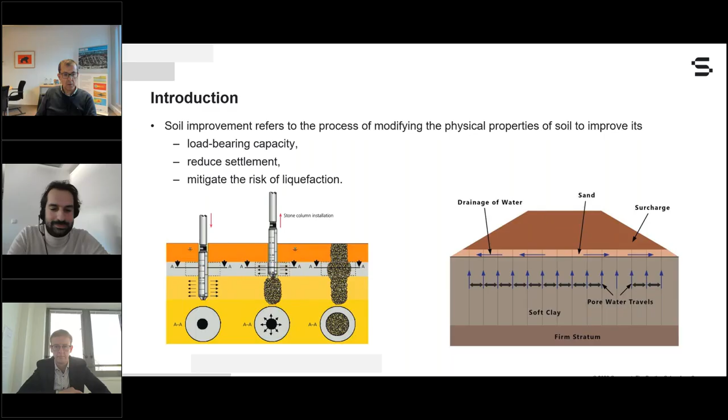So just to start with, a few introductions. I guess you are all familiar in this room with soil improvement techniques and what the main purpose of soil improvement techniques is. It is to fundamentally modify and improve the physical properties of the soil in order to ultimately improve its load bearing capacity, reduce settlement, and also in some cases where it's relevant, mitigate the risk of liquefaction. There are different techniques to do that, and it might be interesting to be able to efficiently model them in PLAXIS to optimize your design.

So when it comes to application of numerical modeling for soil improvement techniques, depending on the different type of methods, that would require different modeling techniques. We can briefly start talking about compaction methods.

The first ones I'd like to talk about are dynamic methods, maybe not the most popular, but still used to quite some extent, like dynamic compaction and compaction blasting, especially dynamic compaction. Those are not commonly practiced in finite element modeling due to their complexity, especially accurately modeling the dynamic impact and transient behavior. It's still possible, but not commonly undertaken.

However, compaction methods relying on static methods like preloading, often combined with vertical drains, as we will be showing today, are quite common. The key points consist of applying a static load, and the properties will be enhanced over time by consolidation. This is suitable for cohesive soil like soft clays.

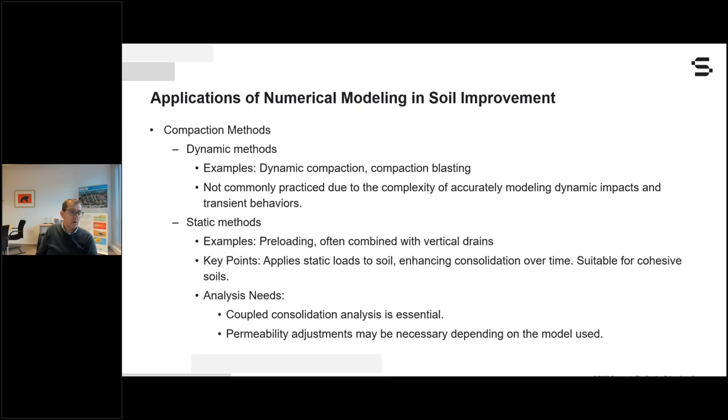This would require usually doing consolidation analysis, which are coupled analysis in PLAXIS, and this seems to be a key aspect. Also, as I will mention a bit later, permeability adjustments might be necessary depending on the model used. I will explain why.

So this is what I will first focus on today in my presentation: the use of PLAXIS for the modeling of preloading with prefabricated vertical drains.

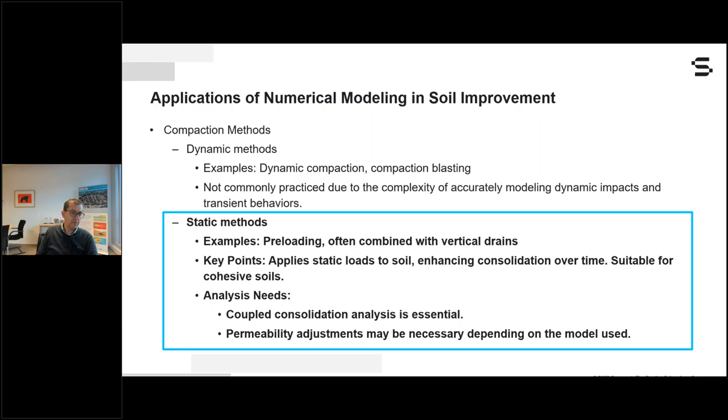Then there are other types of techniques that could also be used in PLAXIS, talking about soil improvement techniques which do not induce displacement of the soil. I could talk about soil freezing, I could talk about injections. For soil freezing, usually these are quite complex methods that require specific constitutive models to accurately capture the behavior of the frozen soil, and especially the change from normal soil to frozen soil.

Here as well, those types of analyses are quite seldom and not commonly performed. I mean, we do have some papers, but this is a very limited type of analysis.

On the other hand, injections are performed, and usually what people do in that case is just replace the property of the soil with that of the improved soil after the injection process has taken place, by just wishing in place a new material corresponding to the improved soil material.

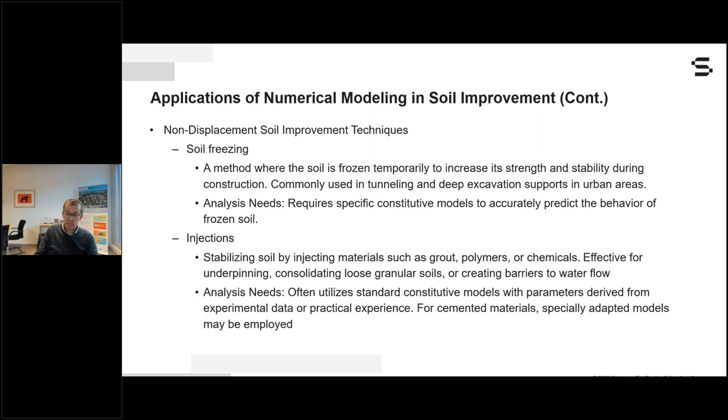This is something I've seen quite a certain number of times. I will not be talking about it today, but this is a possibility with respect to that particular type of soil improvement technique. And then the last one is related to improving by adding structural elements with or without soil displacement.

Especially here, we'll be referring to rigid inclusion and stone columns, which are the two most common types of soil improvement techniques that I will also briefly talk about in the second part of my presentation, before I then give the floor to Jérôme.

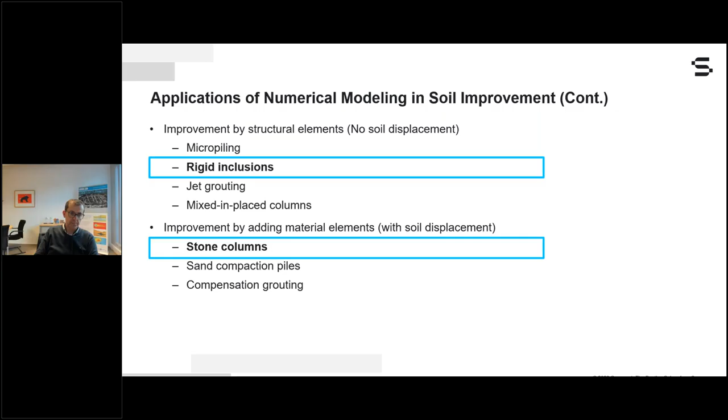So, modeling prefabricated vertical drains in PLAXIS, PVDs. The key modeling steps: first, defining the geometry by considering specifically the PVD layout within your PLAXIS model, with proper consideration of drain spacing, depth, and arrangement. Usually in 2D at least, that's relatively easy and straightforward.

Then the second part is focusing on the material properties. This is where I will be spending most of the time during this first part of the presentation, where we need to assign appropriate properties to the constitutive materials, especially the definition of permeability or equivalent permeability, as I will explain later.

Then the third step would be to define the boundary conditions and analysis setup by properly applying the initial conditions, the drainage boundaries, and finally defining the relevant construction stages. Then finally, result interpretation in terms of evaluating settlements, pore pressure distributions, and effectiveness of PVDs, by checking the factor of safety at different times, as well as the evolution of the degree of consolidation.

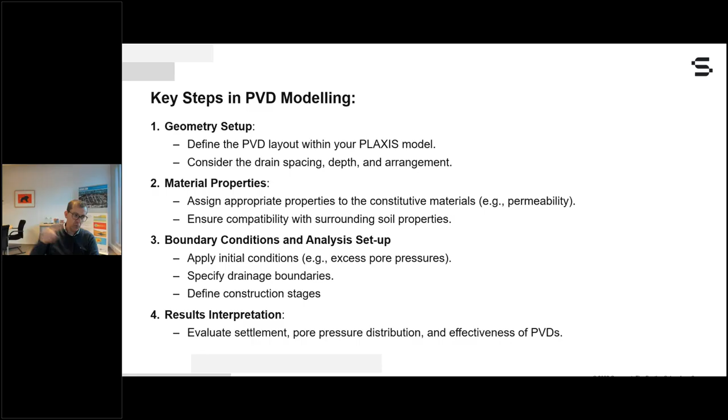As I was explaining, one of the key aspects in defining the properties is to define the permeability of the material. So if we look at the disposition, the setup of the drain, I'm looking at it from the top plane here.

If I compare on the left-hand side the way those PVDs are being placed, and the way we will be modeling them in a 2D framework, we see that in the 2D plane strain model, we are introducing a drainage length that is uniform and cannot properly render this spatial disposition in 3D, where depending on the location in the soil, you are introducing different drainage length.

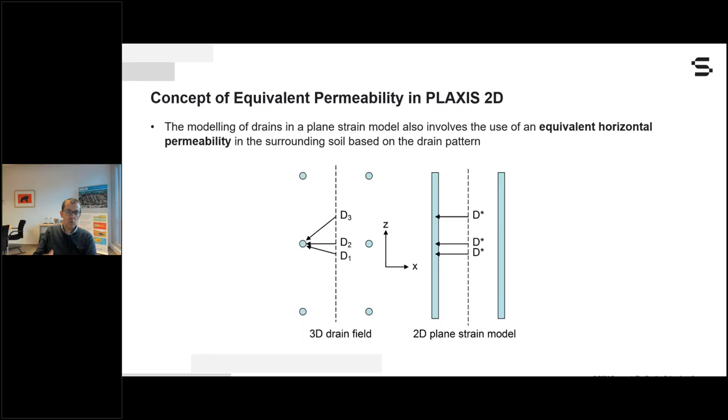In fact, if you use in 2D the same permeability, considering that in 2D the drainage lengths are shorter, you will speed up the consolidation process. So one way to address that, not the only one, is to introduce the concept of equivalent permeability, which consists of reducing the permeability in order to match the proper degree of consolidation in 2D plane strain and the one you would have observed in 3D.

There exist papers and methods that provide equivalent permeability. The three most popular are the ones from Hird, Indraratna, and Chai. This will not be described in this presentation, but in the paper and example we will be providing, we will give extensive reference and explanation on what those methods exactly consist of.

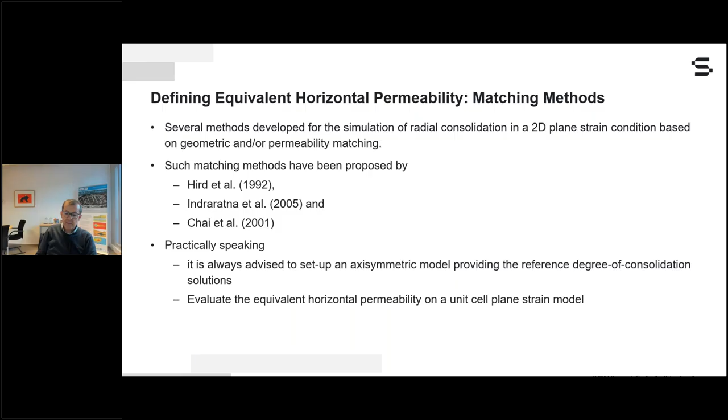The strategy is to first start using those permeability values, and then set up two models. On the left-hand side, a reference axisymmetric model, the radius of which is defined such that the drain affects the proper area relevant with respect to the drain spacing. Usually, if the drains are placed over a perfect rectangular pattern, the influence area would be S squared, basically S times S. So you make sure that your axisymmetric model area equals S squared, define the drain in the middle, apply a load, and look at the evolution of the degree of consolidation with time using the proper permeability values.

Next to that model, you define the equivalent unit cell model, but in 2D plane strain, usually using the same drain spacing. You make sure that while loading that 2D plane strain model with the same load as the axisymmetric model, you obtain the exact same evolution of the degree of consolidation with time. That's the idea. Usually you start from the formula I provided before, then fine-tune by slightly playing with the permeability values until you obtain a perfect matching. That's one of the methods.

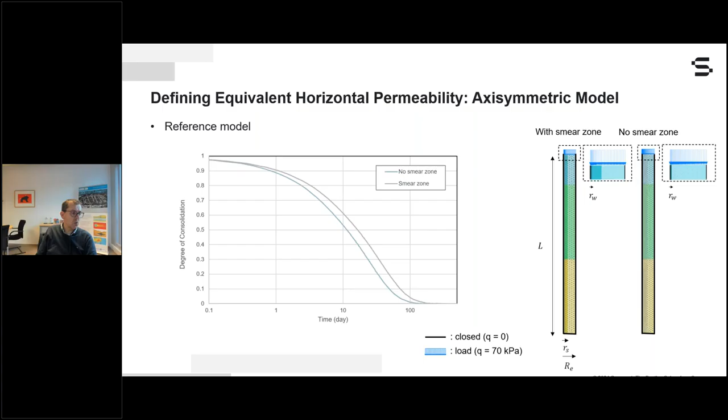Finally, we build up the embankment in stages, monitoring as a function of time the settlement, the evolution of the degree of consolidation, and the excess pore water pressure in between the drains, as well as, for each construction stage, the corresponding factor of safety and associated failure mechanism, to check whether they remain above acceptable values. That, in a nutshell, is the process of running this type of analysis in PLAXIS.

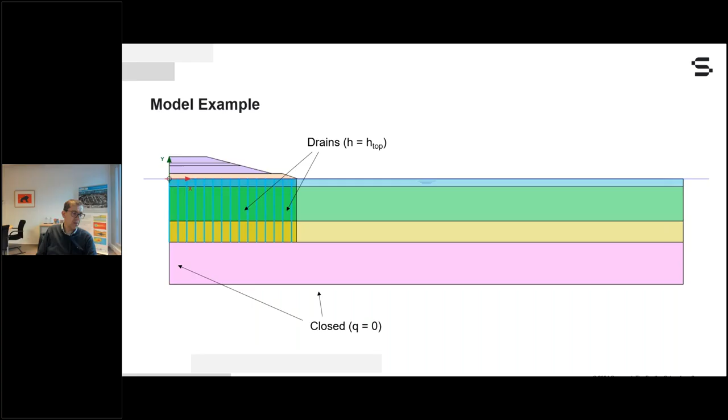This brings me to the second part of my presentation, now more focusing on column-based soil improvement modeling techniques, fundamentally stone columns and rigid inclusions.

In that situation, we are interested in still performing those analyses in 2D, which also requires us to do always some calibration processes.

As I will explain, the 2D plane strain condition does not enable you to properly consider the stress redistribution within the soil, and especially arching effects, which could be taking place in the mattress if you talk about rigid inclusion, or stone columns, as well as eventually the proper permeability, because if you start talking about stone columns, you will also introduce along the stone columns a drainage path. The stone columns will considerably affect and reduce the drainage length.

That's because in 2D, a stone column is nothing more than a kind of continuous wall. And if you compare that continuous wall to what the stone columns look like in reality, you will clearly understand that if you are representing the stone columns like this in a PLAXIS 2D model, you might be considering also playing with the permeabilities between the stone columns to perfectly match the proper degree of consolidation. Honestly speaking, from my experience in this type of problem, I don't think it will affect that significantly the evolution of the degree of consolidation.

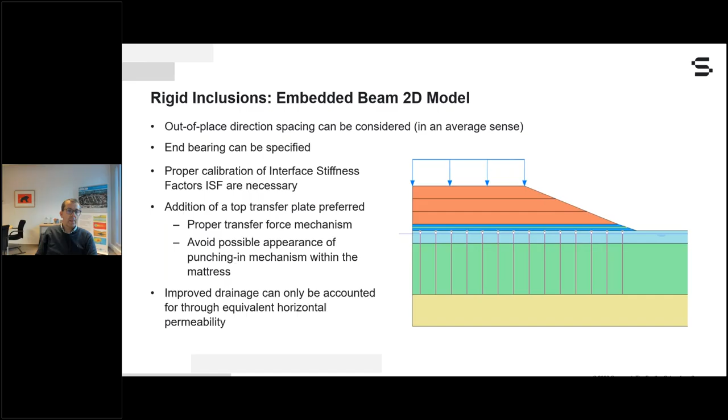So in both approaches, there is a need to set up beforehand unit cell models and do this calibration process, which is what I'm explaining right now.

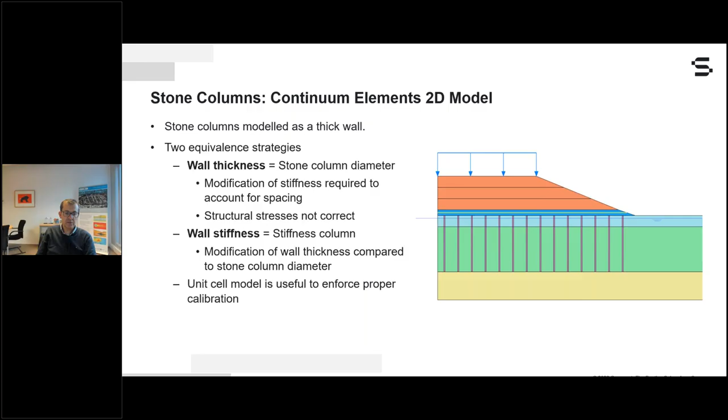The idea is to define the reference solution by first doing an equivalent axisymmetric model, for those who do not have 3D, defining the reinforcement such that the radius provides the same influence zone area as in the 3D reality. If you work out the math, you find that the equivalent radius should be equal to the square root of A times B over pi. This way you are sure that in both the 3D and axisymmetric models, the size of the top surface is the same.

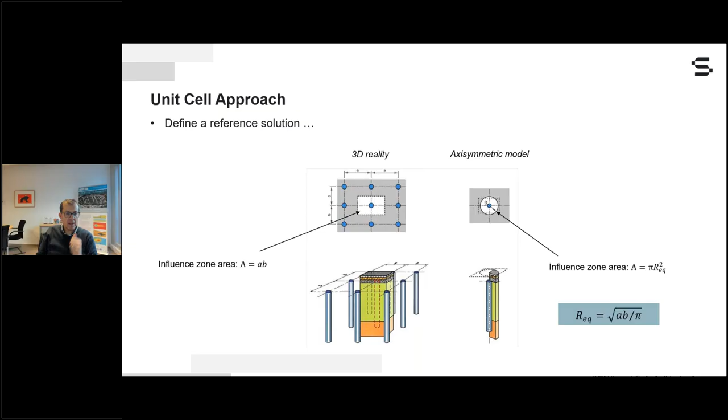So this way you are properly considering what we call cyclic symmetry, due to the fact that you are not dealing with one stone column or rigid inclusion, but an infinite group of them, and you're just focusing on one of them. Okay, so that defines the reference solution.

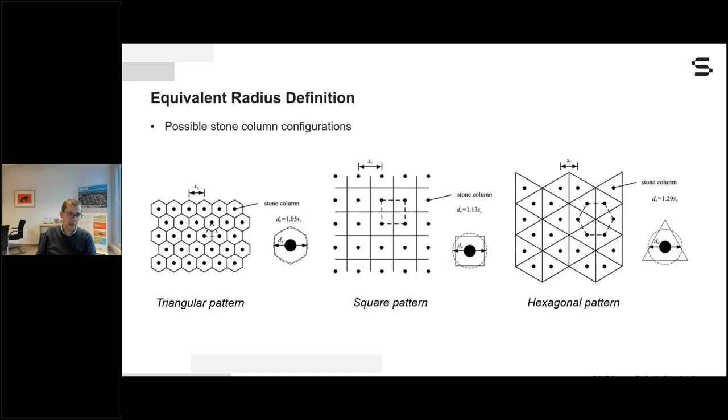Depending on the pattern you are considering, you see how the equivalent diameter or radius could be defined. This is just doing some trigonometry. I don't think there is much interest to go into the details of those formulas here.

And if we do not, what I usually do in the framework of stone columns is start by defining the equivalent thickness - the thickness for which I would obtain at the top the same contact area between the stone column and the mattress on top of it as in reality. I make this equivalence, and this defines the equivalent thickness. This way, even though it's a 1 meter slice model, I have the same contact area between my stone columns and the top mattress.

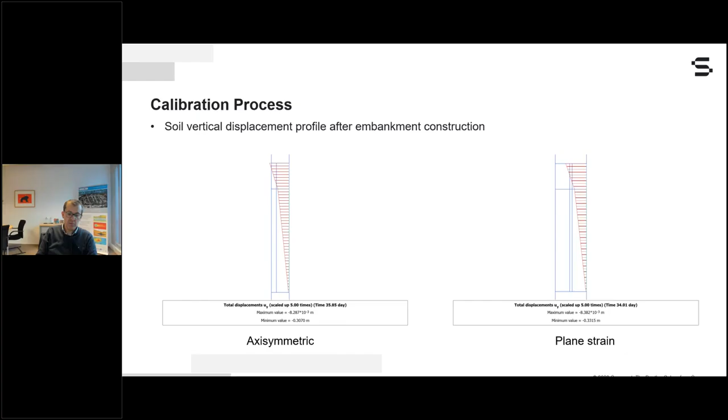Usually when you start this way, you are not that far off - you are already quite close. And if you really want to do perfect fine tuning, you could start playing a little bit with this thickness in order to get a perfect match. The matching has to be done on the displacement profile as well as on the excess pore water pressure evolution and the degree of consolidation.

So this is usually the way I do it for stone columns. For rigid inclusion, this is also something we do, but the calibration process might be a bit more elaborate because we also want to make sure we are obtaining within the rigid inclusion also the same axial force distribution. So this also takes some calibration techniques, especially on the embedded beam element parameters.

I've decided not to present them today because I was a bit afraid of running out of time. But if you check out all the articles that Seequent has published, those techniques in both cases, stone column and rigid inclusion, are perfectly explained and documented, and we are providing all relevant PLAXIS models for each situation. Feel free to reach out to us in case you'd be interested in applying such techniques for your modeling needs.

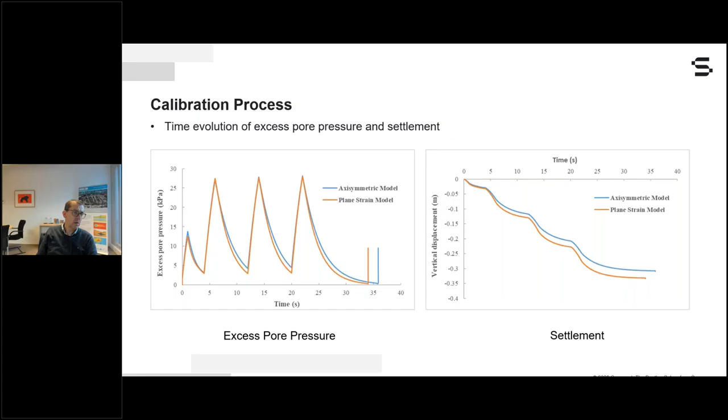And then finally, I'd like to say a few words to introduce the second case study from Jérôme, who will talk a little bit about PLAXIS 3D. Also, do not forget that PLAXIS 3D also provides added value in the framework of analyzing soil improvement.

Main among them is that usually when you start doing 3D, although it could appear to be a bit more costly to set up the model, no calibration is required because 3D will give the most accurate representation of reality and the soil-structure interaction modeling.

So usually the models are set up just considering one slice with one row of columns, and that's the only thing you need to do. Then there is no calibration regarding permeability or regarding the properties of the structural elements.

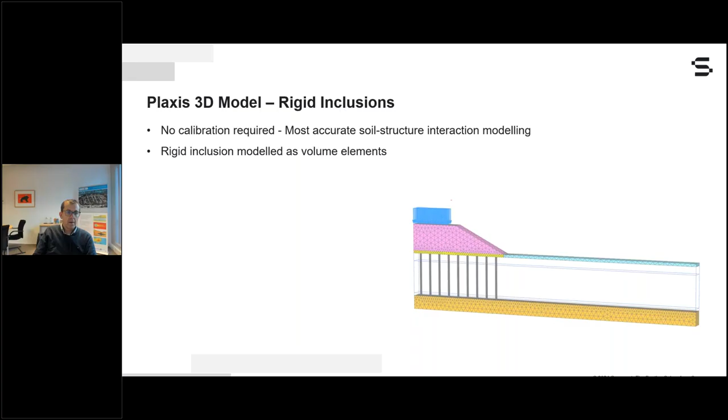Usually in that framework, if you are using rigid inclusion, they will be modeled as volume elements, physically introducing the diameter or cross section of the rigid inclusion. Finally, the evaluation of the structural forces within such volume elements is done using the common technique of dummy beams, which consists of introducing along the neutral axis of each rigid inclusion a beam of low stiffness values, in order to, in the post-processing environment, be able to access the structural forces, axial forces, and bending moment.

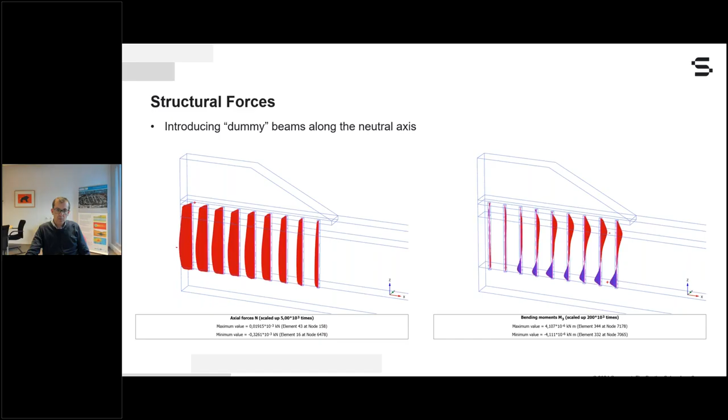So yeah, this is all for me. I will now give the floor to Jérôme, who will elaborate on more practical considerations on using PLAXIS for this type of soil improvement project. The floor is yours, Jérôme.

Unless Daniel, you wanted to say something? No, thank you a lot for the presentation. Jérôme, the stage is yours now. I need to give the... No, okay, all is ready. Don't worry, okay.

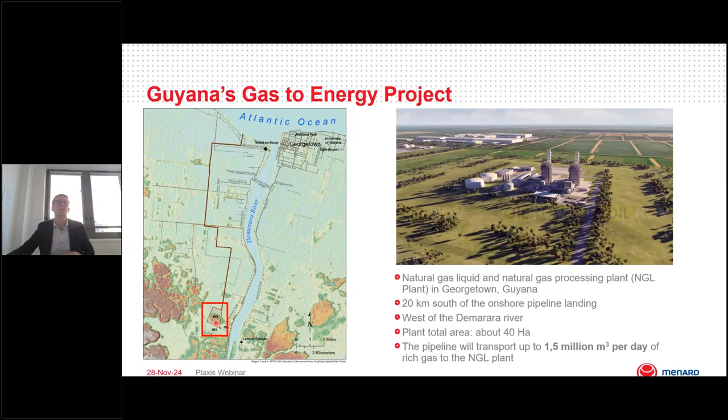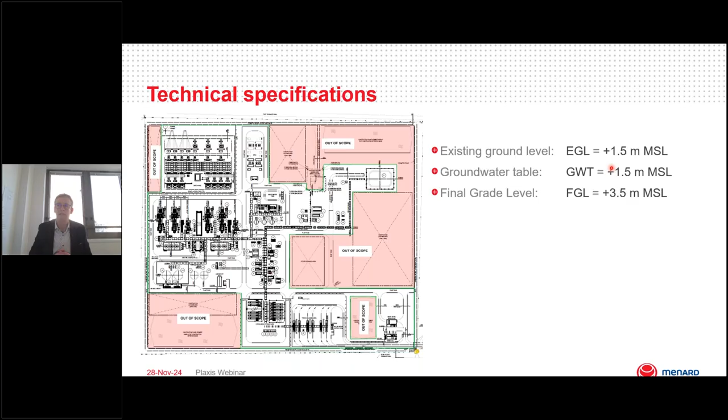So let's focus on this power plant. This is the layout, and a few details on the technical specification. The existing ground level is at plus 1.5, corresponding more or less to the groundwater table, and the final grade level is at plus 3.5, meaning you have a raising fill of 2 meters.

The post-construction settlement, the residual settlement after 20 years, shall not exceed 50 to 100 millimeters depending on the area. That's the technical specification, and that's why we need to implement ground improvement for this project. All the structures you can see here will be built over piles, so the purpose of this specification is only to limit the impact of the raising fill onto the piles, to limit the negative skin friction onto the piles.

This is the general layout of the power plant, plus the layout of the soil investigation campaign. You can see a lot of cone penetration tests and standard penetration tests, so a lot of in situ tests, plus of course some lab tests.

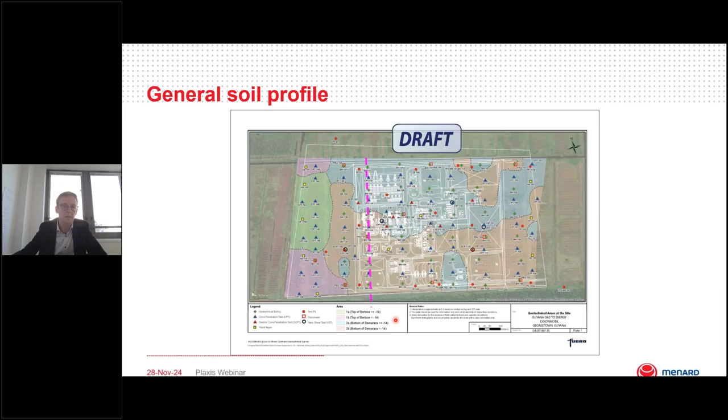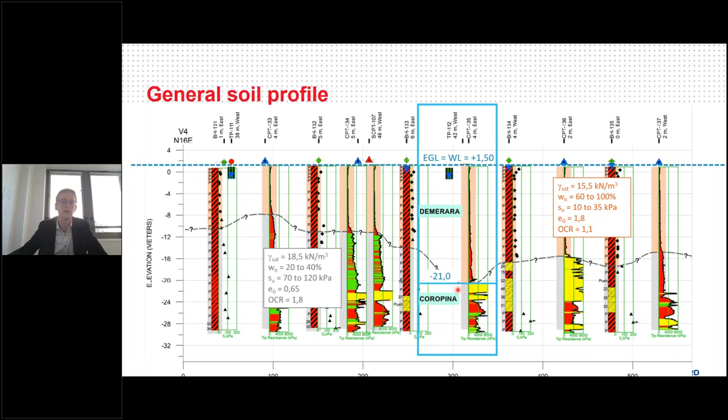So the ground improvement solution consists of prefabricated vertical drains plus preloading. Let's have a look at the project. This is the initial level, and we want to reach plus 3.5, so we want to add 2 meters of fill. The soil is soft, so if you install this fill it will create settlement, and you need to compensate for this settlement. That's why in the preloading solution you need to consider this settlement compensation fill, plus of course the 2 meters of fill.

The soft clay layer is fine and saturated, so this settlement will be very slow if you don't do anything. That's why we add prefabricated vertical drains, in order to accelerate the dissipation of excess water pressure and to accelerate the settlement. But despite the use of PVDs, we won't reach 100% consolidation, so we also need to consider a surcharge in order to accelerate the consolidation again and to anticipate potential creep settlement coming from this soft clay layer.

The purpose of our design is to define the spacing of the PVDs and the total height of preloading required to ensure a residual settlement of 100 millimeters at 20 years. So the idea is to force settlement during the works, then at the end remove the surcharge and guarantee a maximum of 100 millimeters.

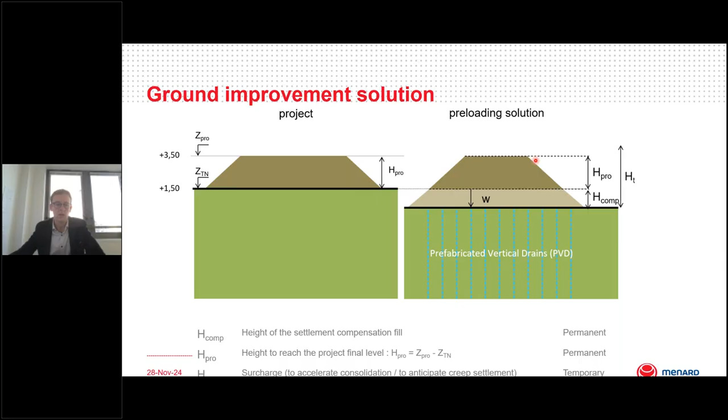A few words about vertical drains: prefabricated vertical drains can be flat, as you can see here, or round. They are made of a flexible polyethylene core surrounded by a geotextile. These PVDs are installed by pushing a casing, as you can see here, within which the drain sits. Once the required depth has been reached, the mandrel is extracted from the ground, and at the end the PVD is cut about 20 centimeters above the working platform.

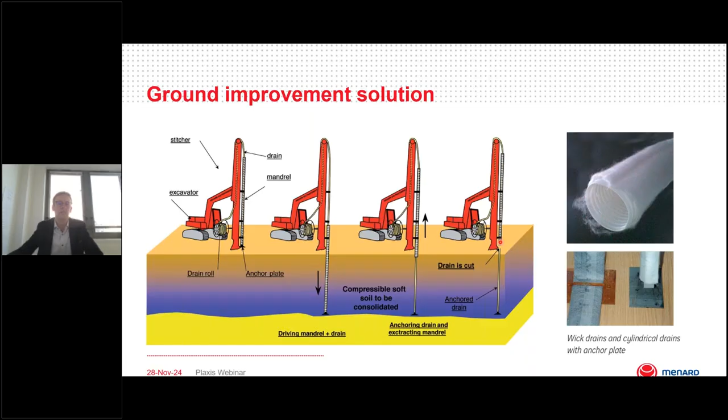It was already discussed by Richard. On site, we will have a square grid, a regular square grid of prefabricated vertical drains. We will be using PLAXIS 2D, and so we will have a drain trench.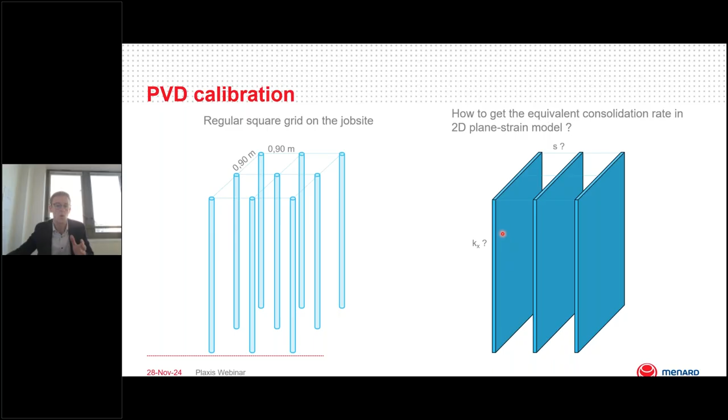So there are several approaches to calibrate the model. You can play with the spacing, you can play with the horizontal permeability. So what we did for this project is calibrate our model on an analytical result. We run 2 unit cell calculations.

From the CV, coming from the oedometer test, we have estimated the KV for PLAXIS 2D as a direct input. We have also estimated the KH, the horizontal permeability. What you can see in this model is that with a spacing of 0.9 meter between the drains in PLAXIS, we were able to get a perfect match with the Barron theory. Globally, to give you an order of magnitude, after 50 days we have a degree of consolidation with the PVD around 80%.

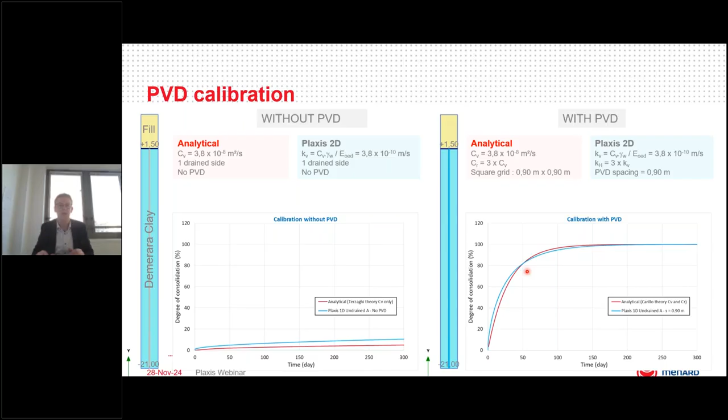Once the calibration on the analytical results is made, we can go to the global 2D plane strain model. This is the initial condition. We've run a consolidation analysis with activation of updated mesh and updated water pressure. You can see the two clay layers, the Demerara clay layer and then the Coropina one.

First, the soft clay layers have been represented by the soft soil creep model. You can see the different parameters, CC, CS, Eoed, all coming from the oedometer test, and KX and KY coming from CV and CH.

The next step is the activation of the PVDs. The preloading, the total preloading, cannot be installed in one step due to stability issues, so we've installed this preloading in 2 steps. First step, we add 3.9 meters of fill in 16 days. You can see that we have added a geogrid, 600 kilonewton per meter.

We have then a consolidation period of 28 days to allow for dissipation of the excess pore water pressure and also to get an increase of the shear resistance of the soil, enough to install the second step. In the second step, we have added 2.25 meters of fill, so in total we have 6.15 meters of fill. This second step has been reached in 20 days.

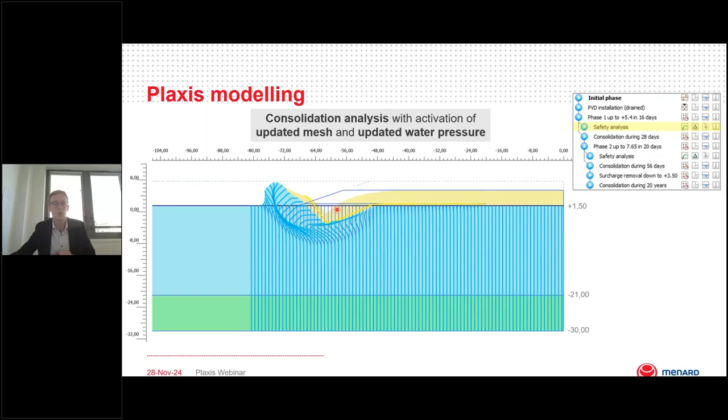We have included also 2 safety analyses: one immediately after the installation of the first step, and another one immediately after the installation of the second step of fill.

Before going into details in the results, I would like to speak very quickly about consistency check. When we install an embankment over very soft soil, there is a risk of slope failure. The very important parameter is the undrained shear strength, SU. You can see in red the SU profile estimated at the beginning of the project from CPT and from vane shear test.

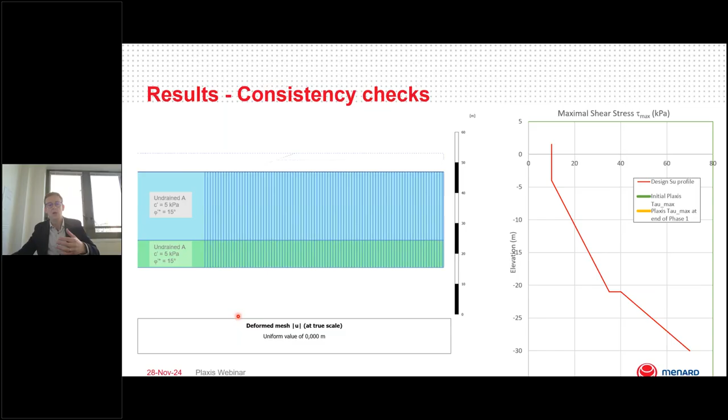But SU is not a direct input of the PLAXIS model. In undrained A, you need to give the effective shear strength parameters. So it's important for me to track the evolution of the shear stress tau max with time, to make sure that we don't overestimate the shear resistance.

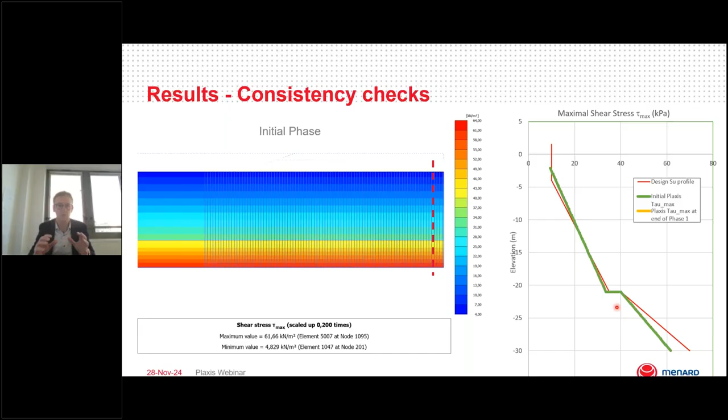At the initial phase, we can see in green that we have a shear strength which is very close to our SU profile. At the end of phase 1, after consolidation under the first step of fill, we can see that we have an increase of the shear stress in the range of 11 kPa, which was in the order of magnitude of the value expected. So it's important to follow this SU profile.

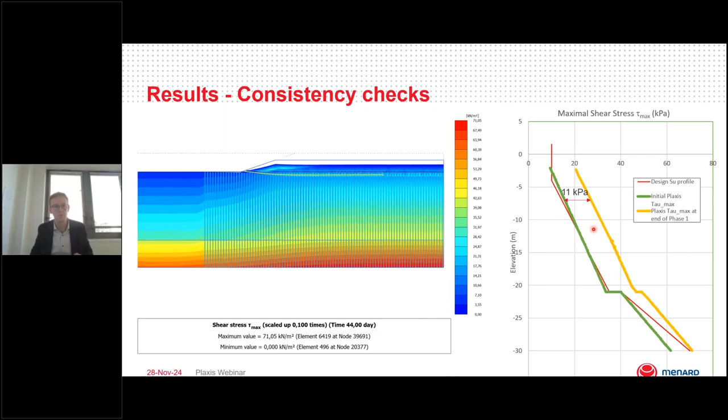Now let's have a look at the vertical displacement. In black, this curve is the evolution of the fill installation. You can see the first phase with 3.9 meter fill and the second one to reach 6.15 meters of fill. Then after 120 days we have removed the surcharge to reach plus 3.5. The settlement which we have recorded is in the range of 2.2 meters.

The settlement must be read on the right axis. After the second step, we've reached 2.2 meters of settlement. And of course, we had to check that after 20 years, we don't exceed 100 millimeters.

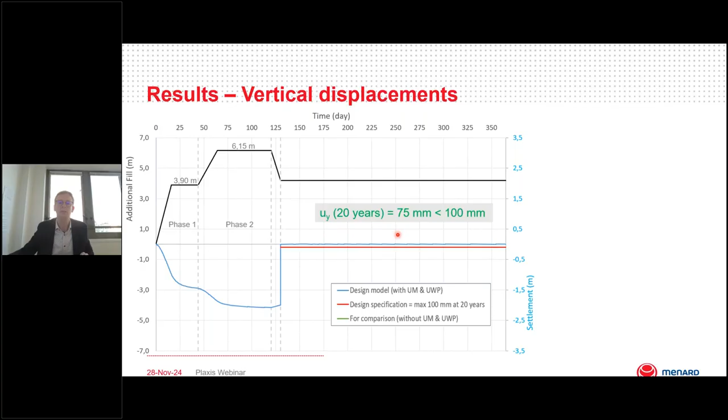Here we have only the result after 1 year, but I can ensure you that at 20 years, the settlement, mainly due to creep settlement, is 75 millimeters, so lower than the technical specification of the client.

So to summarize, we have installed 6.15 meters of fill, and we've had 2.2 meters of settlement. And at the end, we have removed the surcharge, 1.95 meters of surcharge. That's the sequence of works which was designed for this project.

Just for your information, without considering updated mesh and updated water pressure, we would have more settlement. So it's important here to take into account this option to have a better evaluation of the settlement.

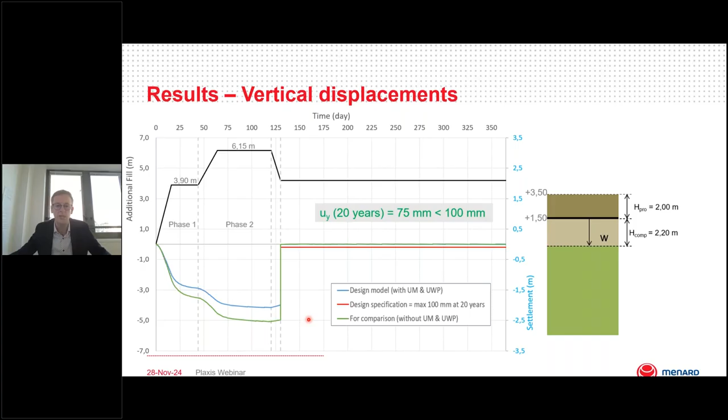If we look at the horizontal displacement, after 120 days, we had in the range of 50 centimeters of lateral displacement.

And immediately after installation of the second step, this is the same results. Without GeoGrid, it wouldn't have been okay. With GeoGrid, we have a factor of safety which is allowable.

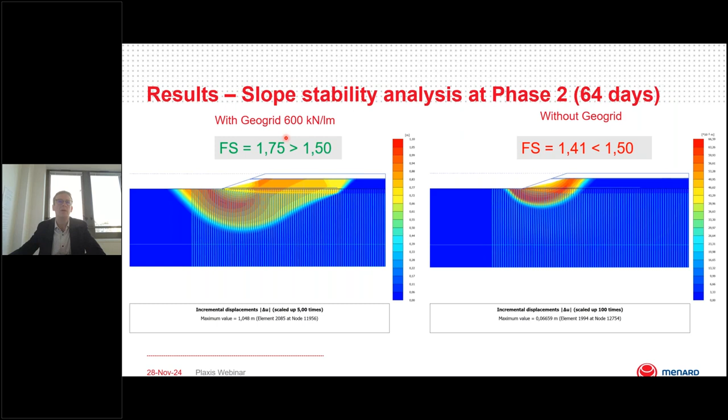Let's move to the job site. You can see a picture here of the project, with 4 PVD rigs working together. You can see also the installation here of the geotextiles.

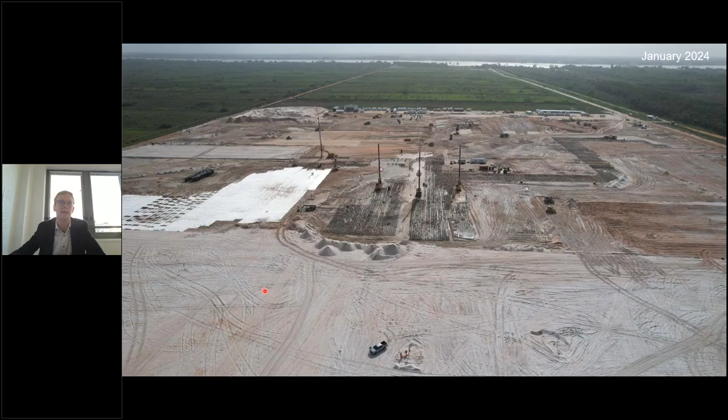At total, you can see the grid, it was between 0.9 and 1 meter. We had up to 5 rigs, and we were able to do 500 PVDs per shift, so in 10 hours. Per shift, one rig can achieve 11,500 linear meters.

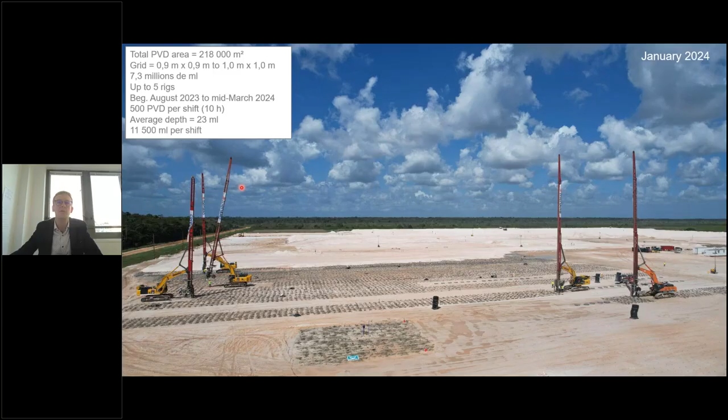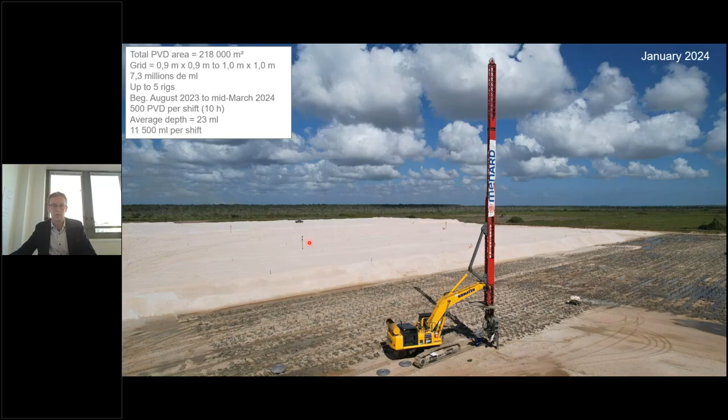On this picture, you can see here the installation of the preloading field with different settlement plates, with piezometers, with inclinometers for monitoring of the results. This is the layout of the different monitoring sensors. I will focus at this location here, where we have a settlement plate and where we have an inclinometer.

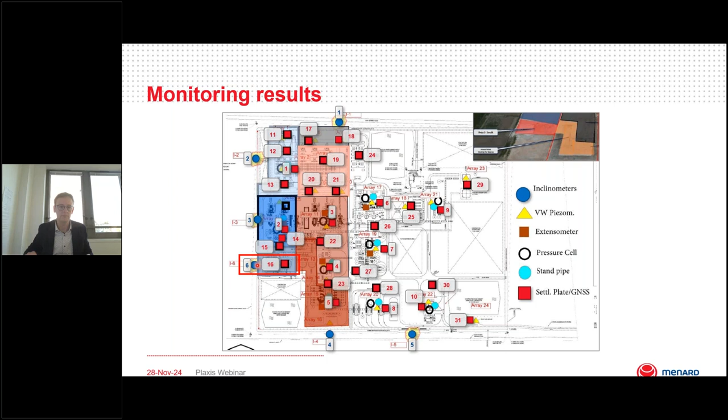So on the left, you can have a look at the vertical displacement with time. This was this year, you can see. According to the installation of the field, you can see the first step and the second step. What we noticed is that the settlement was a bit slower than expected.

So we had to add one more surcharge, another step to make sure. We had a behavior which was a bit slower than expected, so we calibrated our PLAXIS 2D model and had to fine-tune a bit our design during the construction.

But at total, you can see the total settlement is in the range of 2 meters at the end, so very similar to the initial prediction. And regarding the horizontal displacement, coming from the inclinometers, we have between 40 to 50 centimeters of horizontal displacement. So the initial predictions were quite in line with reality. That was a good project at the end.

Before maybe going to the next presentation, do we have some questions, Daniel, on this first case?

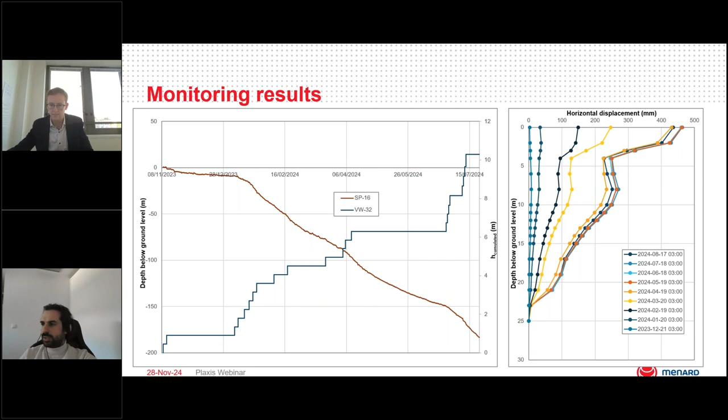Yeah, we have actually a lot of questions. I will try to pick one now so that we can get other later. What are the benefits of the updated mesh and updated water pressure options?

Yes, good question, thank you Daniel. Actually, you can see that the settlement was quite high, 2.2 meters of settlement. That's why it's important here to select updated mesh, in order to take into account large deformation analysis first.

And then why updated water pressure? It's because you can see you have one part of the field which is going underwater. So in order to consider the pore water pressure at the correct location, you need to use this updated water pressure option. So yes, it's important because you have large deformation and one part of the field going below the water level.

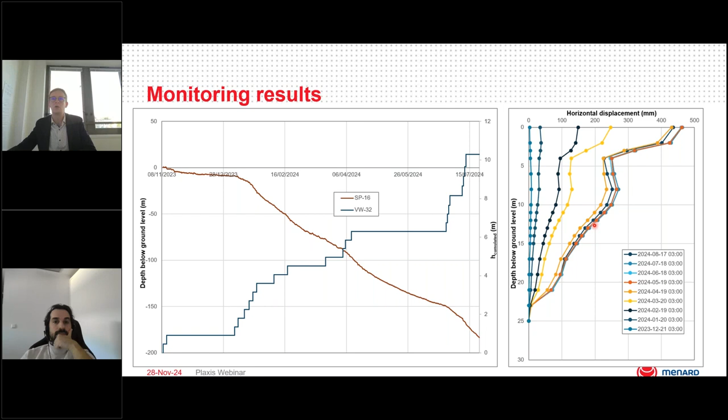So let's go to the second case study, which is about footing over soil reinforced by rigid inclusions, without any load transfer platform. I will explain a bit later, and subjected to an inclined loading, so we will have vertical loading plus horizontal loading.

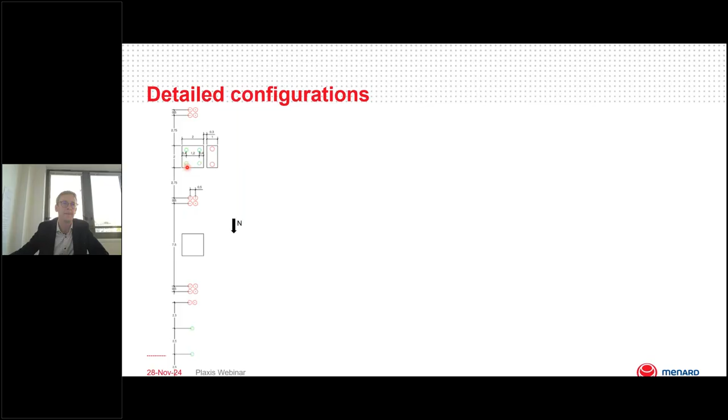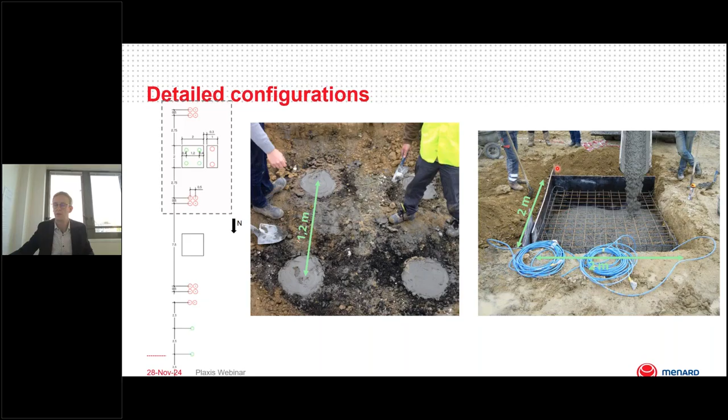In order to apply a vertical loading, we've used a plate plus a jack and of course a reaction system. The reaction system is made of this beam plus 4 piles on each side. You can see in red the 4 reaction piles on each side, to apply a vertical loading on top of the footing.

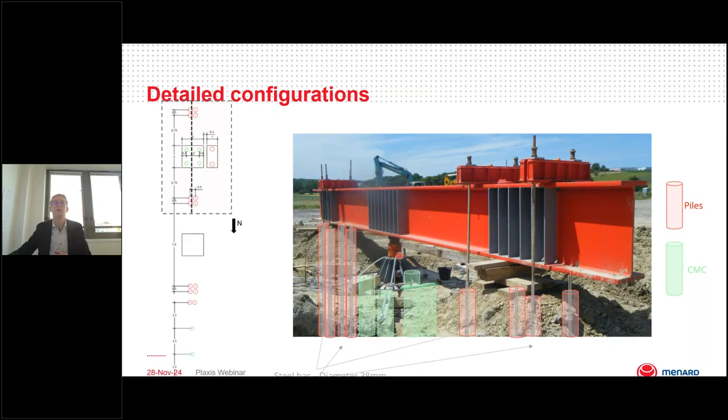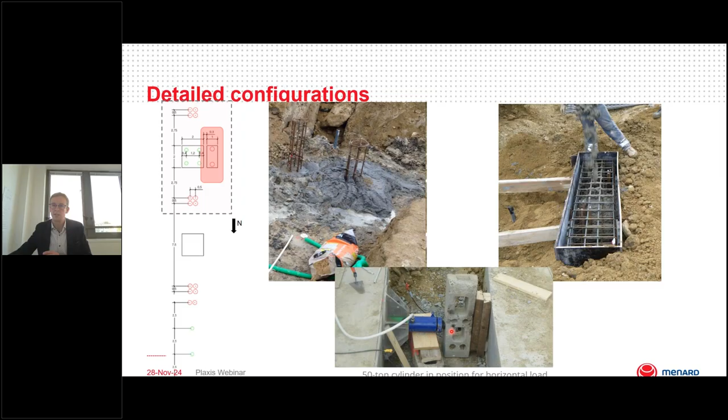We have also installed 2 piles here in red plus a concrete block which is a reaction system, in order to apply a horizontal loading. You can see here on this picture the plate, the jack, and the reaction system in order to apply a horizontal loading onto the footing.

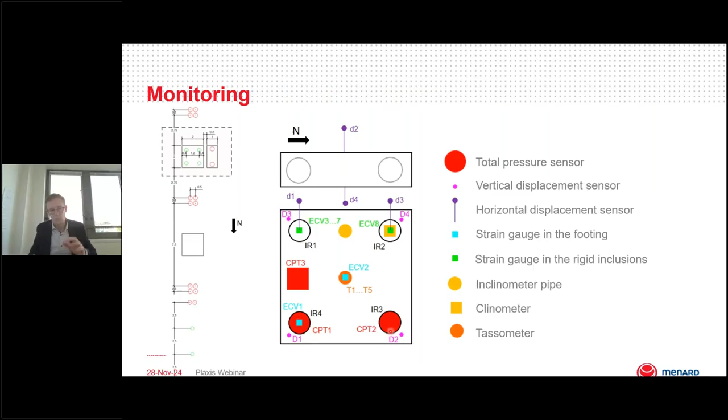We had a lot of sensors to monitor displacement, pore water pressure, vertical stress. We also built a footing over non-reinforced soil, to have a reference result. So I will focus only on the results coming from the footing over the 4 rigid inclusions.

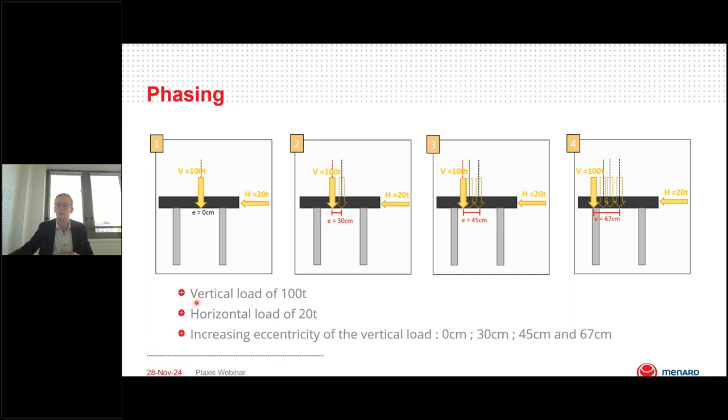A few words about the soil conditions: they were really easy - 1 meter of fill, 4 meters of loose silt, and then very dense sand and gravels.

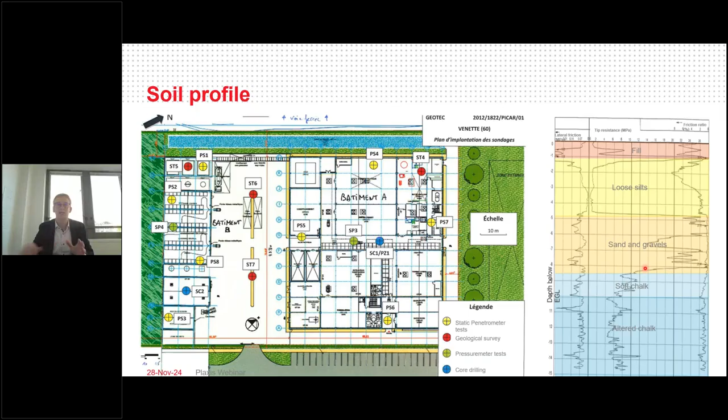Why did we analyze the behavior of a footing directly on top of the rigid inclusion? It's because it's a very common situation for industrial buildings, for warehouses. The slab is supported by soil reinforced by rigid inclusion, associated with a load transfer platform, but the footing that supports the column rests directly on the rigid inclusions.

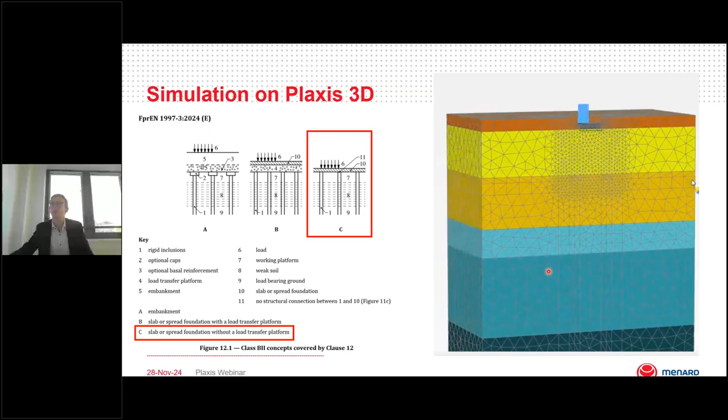By symmetry, we were able to represent only half of the model. If I remove the loose silt, you can see the rigid inclusion, the volume element with the interface - you have interface around the rigid inclusion and below also the footing. We also have a dummy beam here in pink that was presented before by Richard. This is the 3D model that we have run.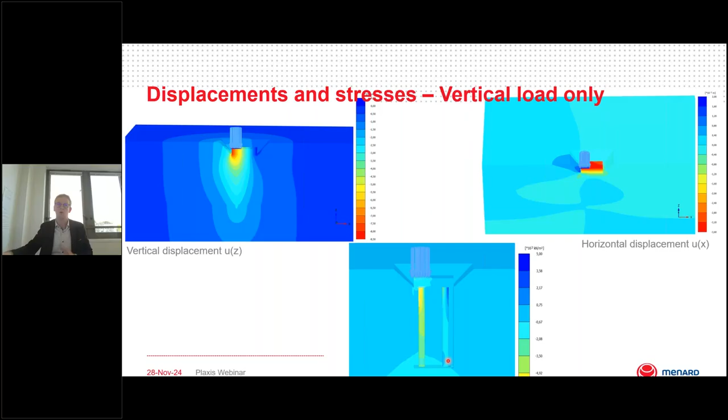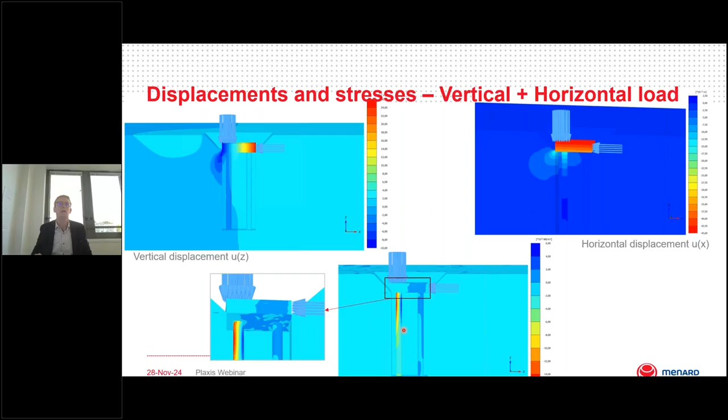I would like to finish with some results. You will see here the horizontal displacement of the rigid inclusion, the horizontal displacement of the soil, axial force in the CMC, bending moment in the CMC, and extreme fiber stresses in the CMC. Let's start with a vertical loading at the center of the footing.

You can see the horizontal displacement of the CMC, the rigid inclusion, is exactly the same as the horizontal displacement of the soil. So we have 7 millimeters of horizontal displacement. The axial force is more or less the same for each CMC, and the bending moment is very limited.

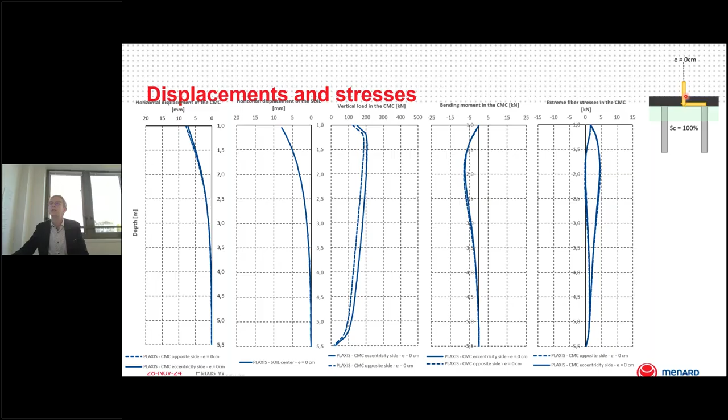Now let's move the vertical load a bit. I've shifted the load by 30 centimeters. Let's look at the results. The horizontal displacement is not really affected. But if you look at the axial force of the CMC, this one located directly below the vertical load is subjected to 300 kilonewtons, as opposed to this one, subjected only to 100 kilonewtons, because it's located quite far from the vertical load. And the bending moment is a bit higher than previously.

Finally, considering the highest eccentricity, let's look at the results. Here we have very significant differences. If you look at the horizontal displacement, you can see one CMC directly below the vertical load moving a lot, 15 millimeters, exactly as the soil is moving, while the CMC at the rear, at the opposite direction of the eccentricity, does not move at all, almost nothing.

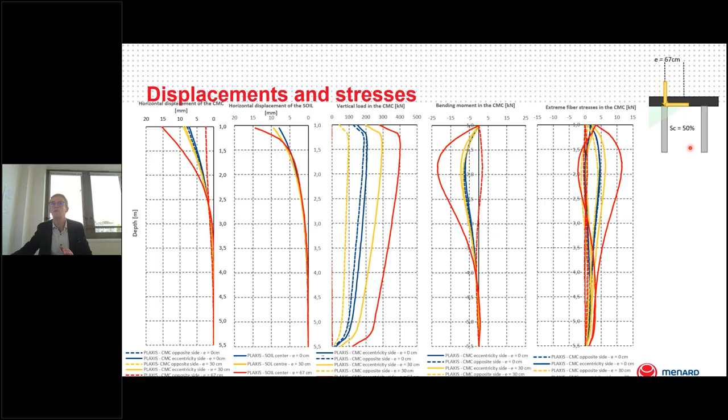And if you look at the axial force, you have a maximum axial force in this CMC, and almost zero in this rigid inclusion. Looking at the bending moment, this CMC is subjected to a high bending moment, around 20 kilonewton meters, whereas the other CMC sees almost nothing, with the bending moment close to zero.

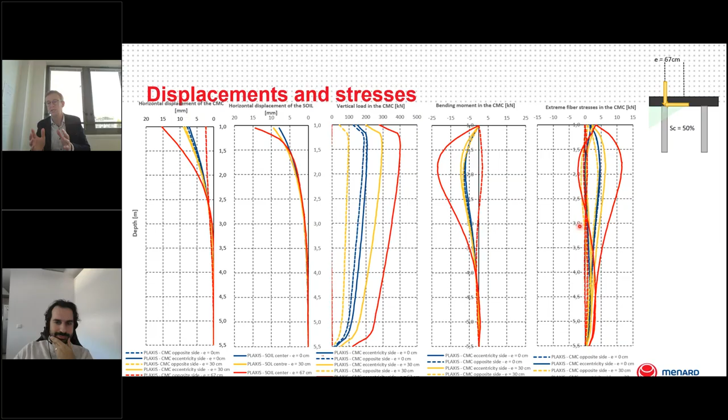So from this research, we were able to define this conclusion. If the inclination is lower than 20%, there's no need to reinforce the rigid inclusion, and we have more or less generalized this idea. If the inclination is higher than 20%, you must run a calculation. Attention should be paid - either you add an LTP, a load transfer platform, or you can also reinforce the CMC. But you have to be careful when you have high horizontal loading.

Yes, I'm more or less on time. Do we have some questions, Daniel? Yeah, we have a lot. Let me pick one. Jerome, first of all, thanks a lot for the case studies.

We should mention this. The question is: there is no load transfer platform in your rigid inclusion modeling. What would be the impact of having a load transfer platform?

Yes, okay, so there's no LTP, as you can see here. We have directly the footing on top of the rigid inclusion. If we had a load transfer platform in between the rigid inclusion and the footing, it will necessarily increase the vertical displacement of the footing, because you will get some part of the load going through the soil. So if you add an LTP, you increase the settlement, but at the same time you will also reduce the bending moment. So it's a compromise, it depends on the project. But I would say if you add an LTP, you have an advantage - you will reduce the bending moment - but you will also have a drawback - you will increase the settlement.

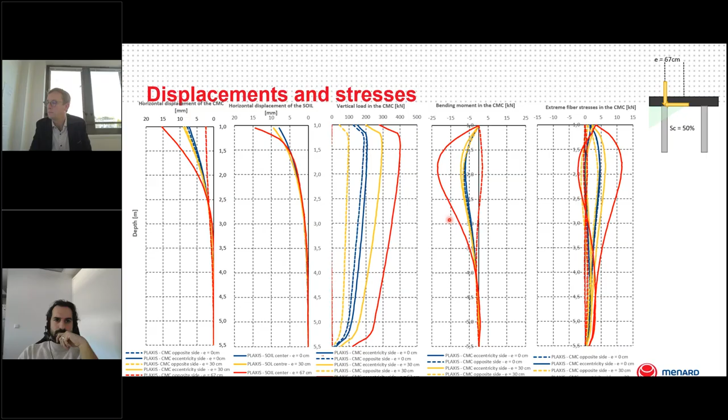So it's really depending on the project. For projects where the load is mainly vertical, no need for an LTP. If you are in seismic areas, for instance, where you have huge horizontal loading, it's better to have a load transfer platform to limit the bending moment inside the rigid inclusion. So that's the main aspect, I would say.